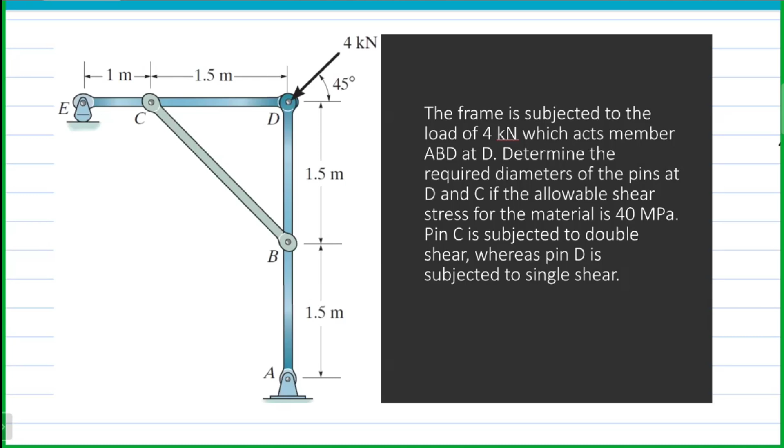We are required to determine the diameters for the pins at point D and point C. The allowable shear stress is already given, and another note is that the pin at C is subjected to double shear while the pin at D is subjected to single shear, so we need to determine their diameters.

I already wrote the requireds. So as our first step, we determine the unknowns for this problem. Second is to draw the free body diagram for the members. So I draw here the FBD of ABD.

Since we are required to determine the diameter at point D, we need to get dy and dx. But as you can see, this free body diagram has four unknowns. So how do we determine the forces?

Since this is a composite body, this will be a lot more complex than your regular composite body. So I suggest taking the moment at point A, since taking moments will eliminate some unknowns, and the forces at point A will not be useful for this type of problem.

If we take the moment at point A equal to 0, what forces will create a moment at point A? We have the x component of FBC, which will rotate counterclockwise, so that's negative FBC, horizontal component 1 over square root of 2.

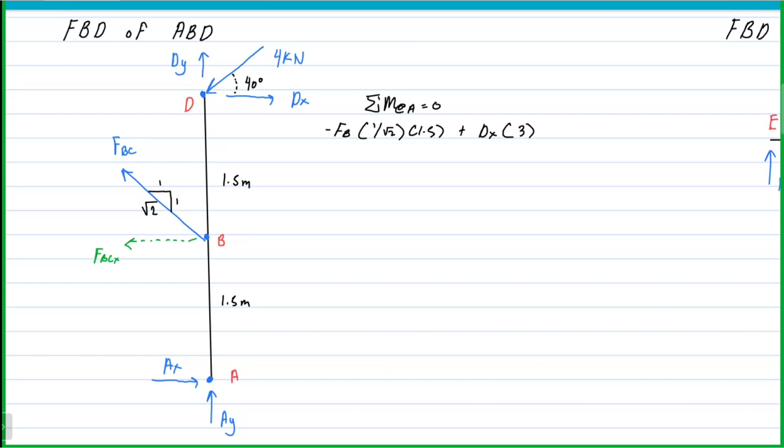The distance is 1.5. Dy will pass through point A. Dx will rotate clockwise, so that's dx with distance 3. And then the 4 kilonewtons will also create a moment, but this time it's the x component only, and it will rotate counterclockwise, so negative 4 cosine 40, distance 3 meters, equal to 0.

Let's take this as our equation 1. As you can see, we have derived an equation involving FBC and dx. I think that's okay for now.

Let's check if we can derive another equation from the FBD that will involve FBC and dx. Take note, we took the moment at point A since the forces at point A will not be useful for this problem. Here's the free body diagram for ECD.

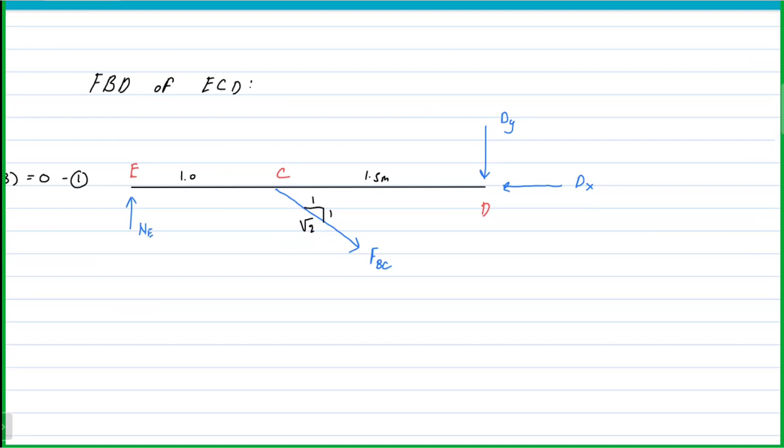We need to determine what equation to use for this free body diagram. It must again involve FBC and dx, so I think we could use summation of forces along the x-axis for this.

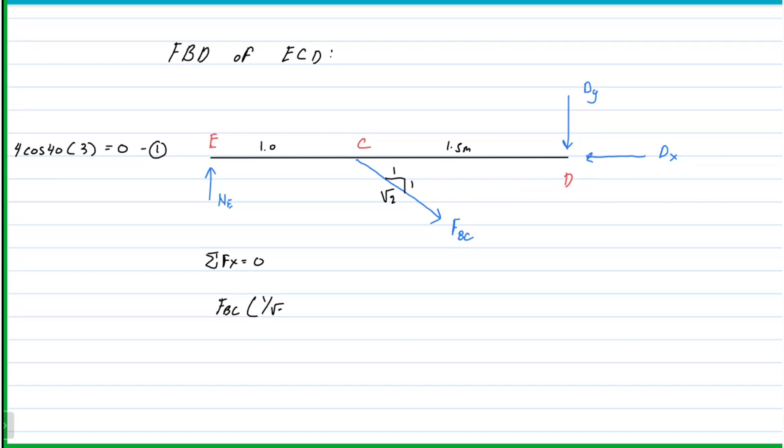As you can see, we have FBC to the right, so that will be positive, FBC horizontal component 1 over square root of 2. And then we have dx assumed to the left, so negative dx, equal to 0. This is our equation 2.

Fortunately, since we took the time to analyze the free body diagrams, we are able to generate equations that involve FBC and dx. With this, we could establish their values so we can eliminate more variables. So involving FBC and dx, we have equation 1.

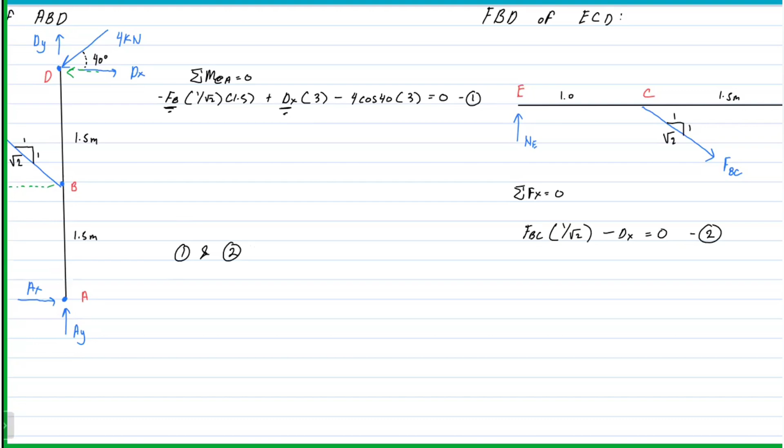Let's organize our equations. For equation 1, simplifying, we have negative 1.061 FBC plus 3 dx, and then we transpose the constant to the other side, giving a value of 9.193. So this is our equation 1.

For equation 2, we have FBC. So I'm going to write this here: 0.707 FBC minus dx equal to 0.

We could set FBC as our x and dx as our y values, and then use our calculators, mode 5.1, or the equation function on your calculator, or other methods to determine the values of FBC and dx. In my case, I will use my calculator.

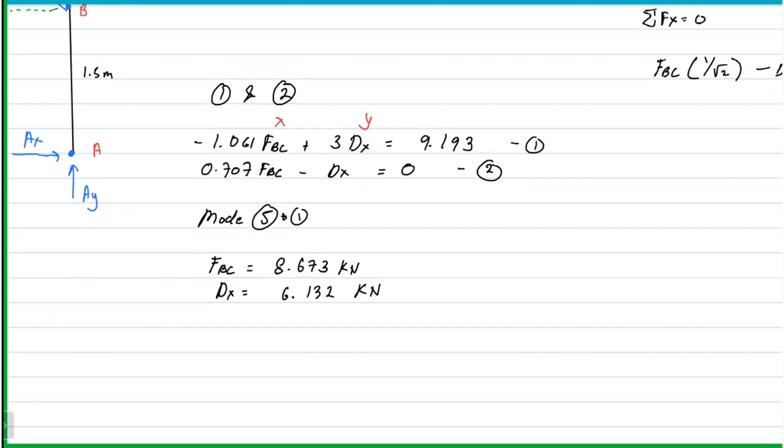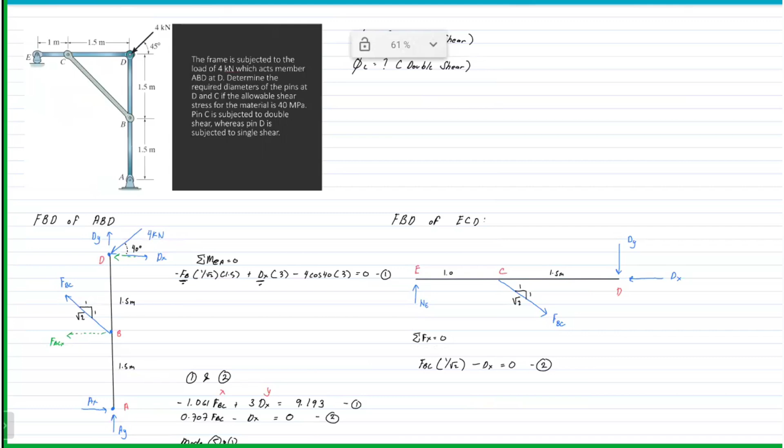So we could get back on our free body diagrams. Take note again, we are required to determine the diameter at point D and the diameter at point C. I think we could get the diameter at point C since we already determined FBC.

So the problem here is to determine the forces in point D. Since we have already gotten FBC, we could use this free body diagram to determine the other two, or to determine dy. We already gotten dx, so to determine dy,

we could take the moment at point E equal to 0. So the forces will be the vertical component of FBC. This will rotate clockwise, FBC will be rotating clockwise.

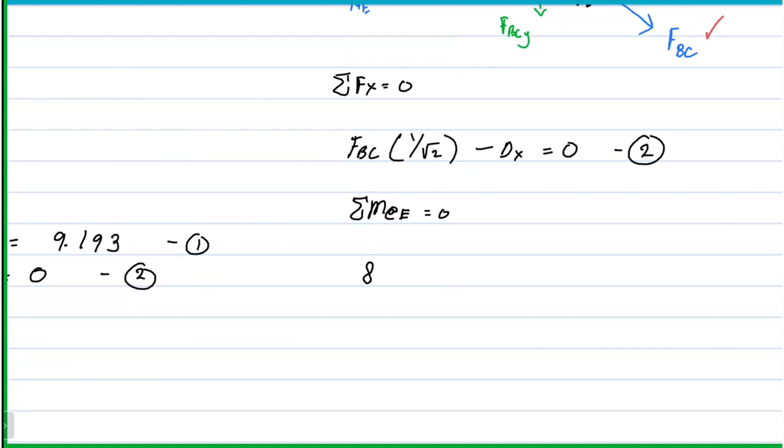So our FBC is 8.67, vertical component is 1 over square root of 2, distance is 1. And then we have dy rotating clockwise with a distance of 2.5. So that is equal to 0, so we could determine dy.

So we will get a negative value here. Negative 2.45 kilonewtons, or the direction will be 2.45 kilonewton upward.

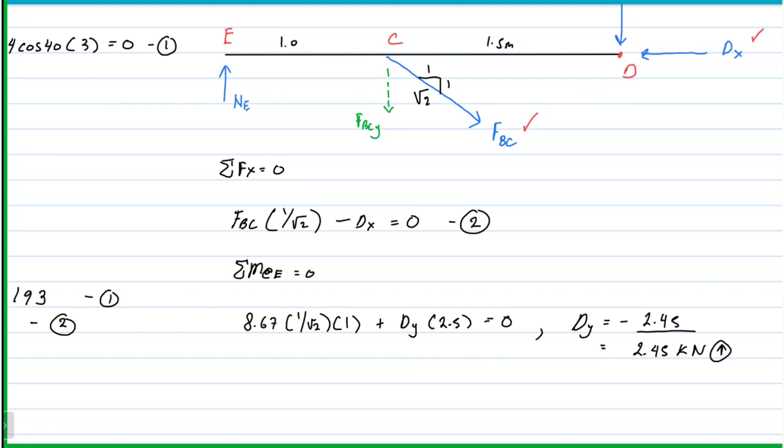So we finally gotten the required forces for each pin, so we could proceed in determining the required diameter. For the diameter at pin C, which is subjected to double shear, the allowable stress is 40 megapascal, equals the shear force at pin C, which is FBC. FBC equal to 8.673, so we could multiply this to 1,000 for it to become newtons over 2, since pin at C is subjected to double shear, times the area diameter squared. So to determine the diameter at pin C, we can use our Shift-Solve function.

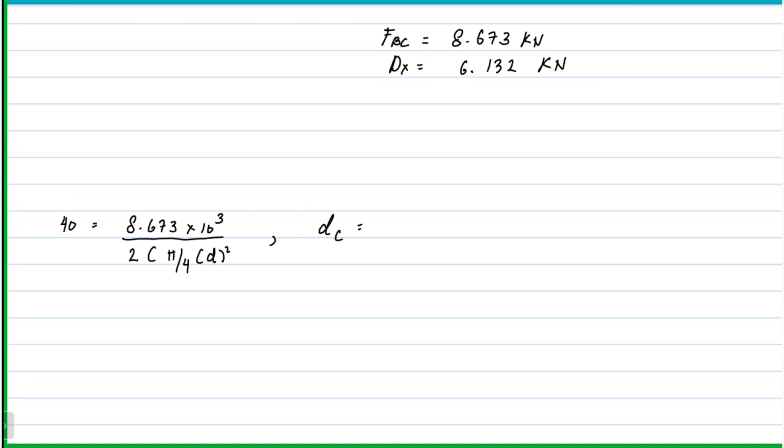So DC will be equal to 11.749 millimeters, or roughly 12 millimeters.

so to determine, we could use our calculators again to determine the value for the diameter at point D.

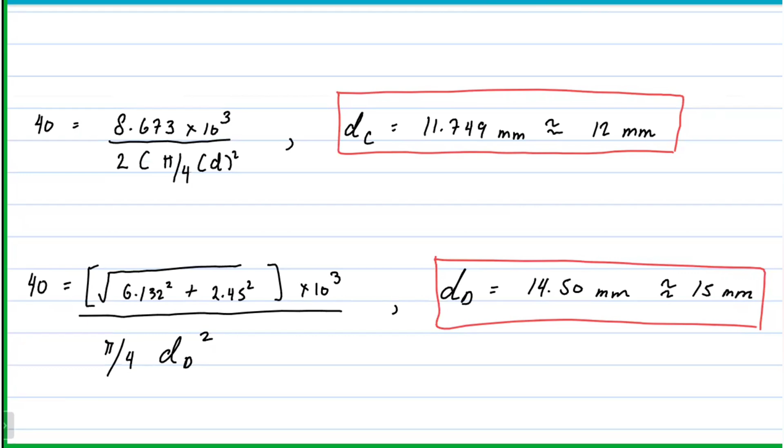So the diameter at pin D is equal to 14.49 or 14.5 millimeters, or roughly 15 millimeters. Okay, so another set of examples for shear stress involving composite bodies of structures.

All right, so for the next problem, this is a combination of axial stress and shear stress. This is a design problem since we need to determine a minimum value for a dimension. This is a truss made from Guijo, a type of wood used in construction. There's a vertical load applied at the top of the truss, and we are given different sets of allowable stresses for the grade of wood: compression stress parallel to the grain, a compression stress perpendicular to the grain, and a shear stress parallel to

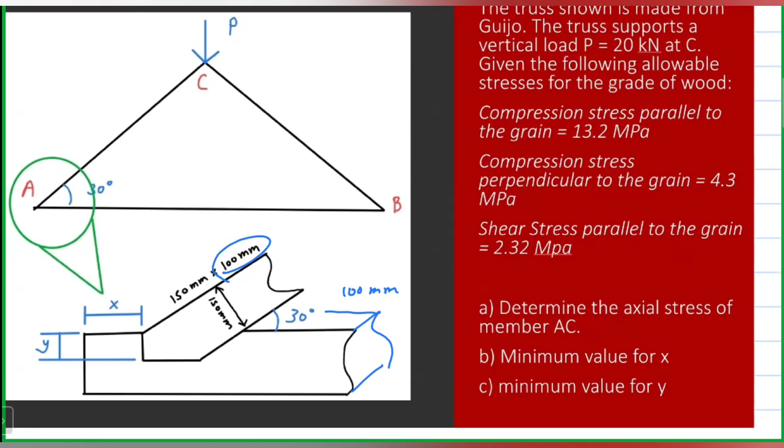So we need to determine the axial stresses. For us to determine the axial stress, of course, we need to get its axial force first. So since this is a truss, we can use method of joints.

It will be easier rather than using method of sections. Let's take that. So we can consider the joint C for determining AB.

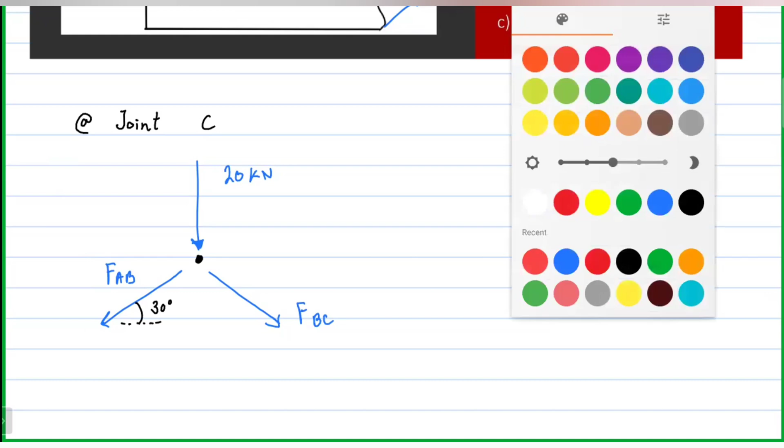So we could use summation of forces along Y first. So you have negative 20. Since FAB and FBC is symmetrical, most likely FBC is equal to FAB. So we can use -2 times FAB sine 30 equal to 0.

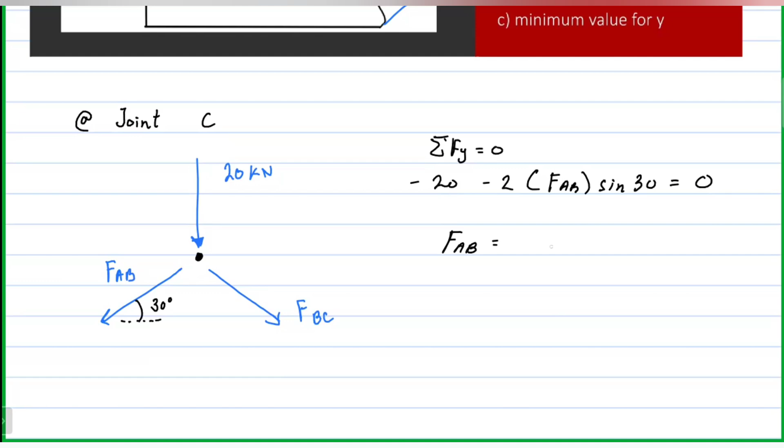So solving for FAB, so FAB is equal to 20 kilonewtons. So since this will be negative, it means this is 20 kilonewtons compression. So we assume FAB and FBC as tension, but in reality they are in compression.

So since we have FAB, we could easily determine the axial stress. So axial stress of... oops, I'm sorry, it's not FAB, FAC rather.

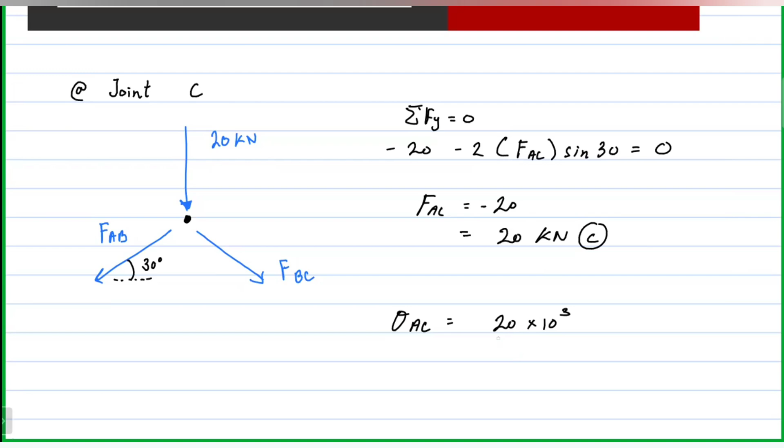So the stress at AC is equal to the force. The actual force is 20, so let's multiply it by 1,000. And then the cross-sectional area of FAC is 150 by 100 millimeters. So our stress at AC is equal to 1.33 megapascal compressive stress.

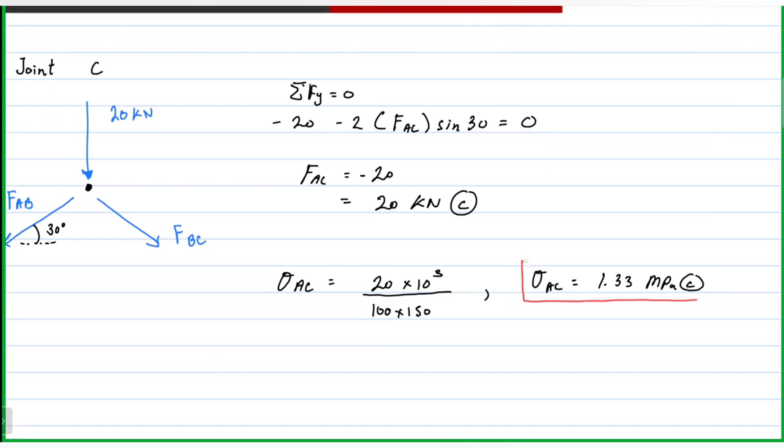Okay, so just as easy like that. And then let's determine the minimum value for X and Y. So investigating this figure, we know that FAC is here, or the force is residing in this member, compressively going to joint A.

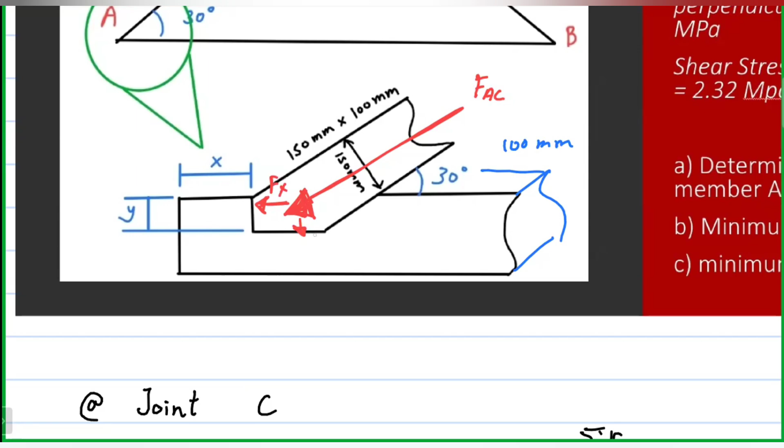So we could further analyze this figure if we look at this force by its component. So this force has two components, the Fx and the Fy. So let's check first the Fx.

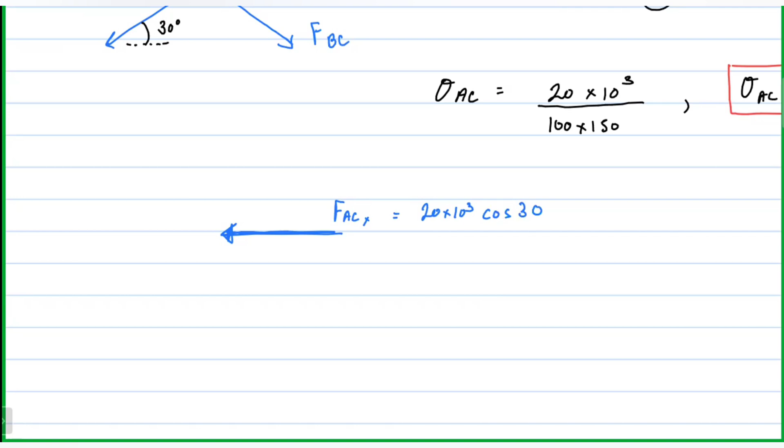If FACX is equal to the force AC cosine 30, so it matches there at the part of our Y. So this is now it. So this is the Y, and then this is the thickness of the member.

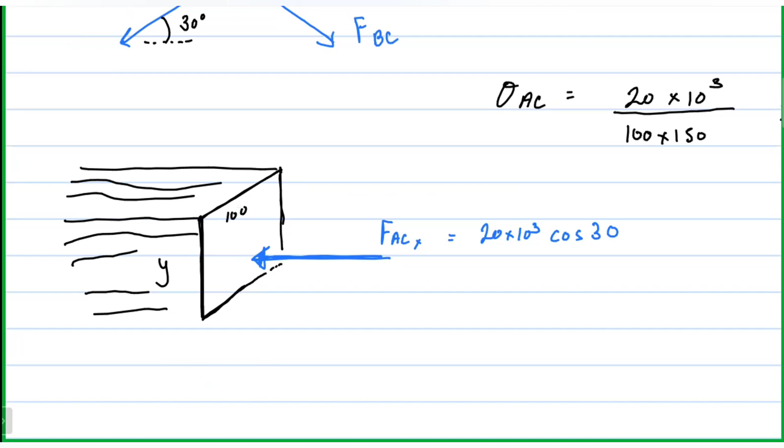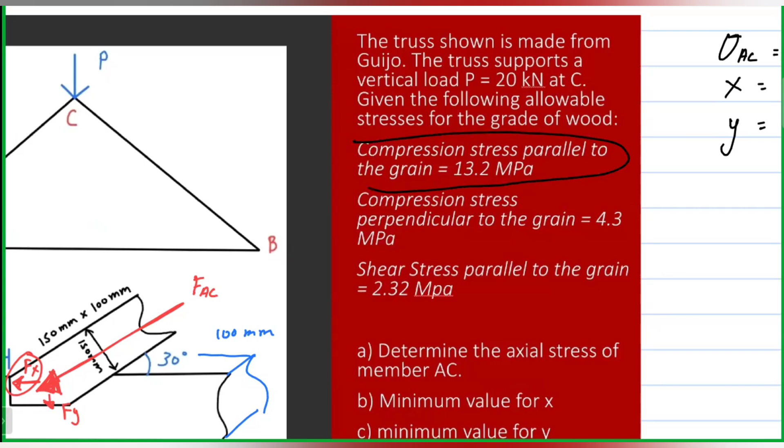So this is the member, so the grains are here, and they are being subjected to compression. So for us to determine the minimum value of Y, we could use the value of the compression stress parallel to the grain, since the force involved in this figure is parallel to the grain.

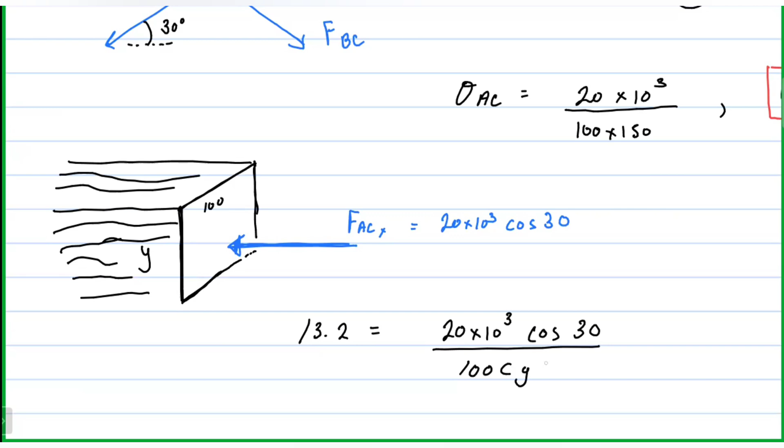So that will be 13.2 megapascal. So the force involved is FAC cosine 30, and the area affected by this force is this rectangular area, which is 100 times y.

So solving for y, y is 13.12 millimeters.

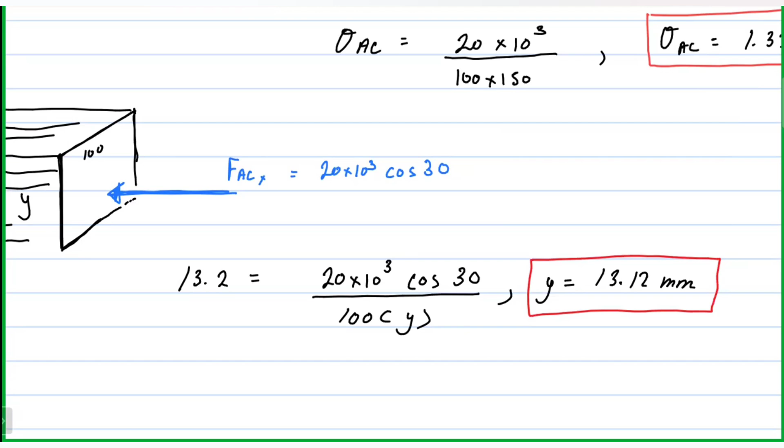And then for the minimum value of x, if we could see this, so the possibility here is the compression might resist FACX, but it can be sheared along this area, which is also equal to x.

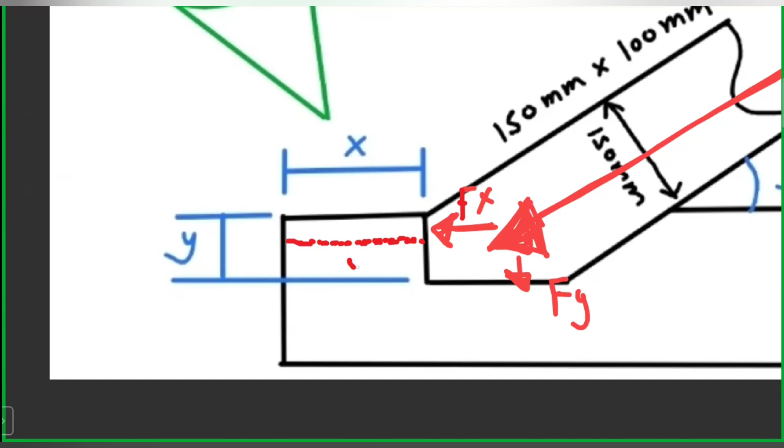So if we investigate that area, the shape will be like this. So this is the x, and then this is the thickness of the member. So these are the grains of the member.

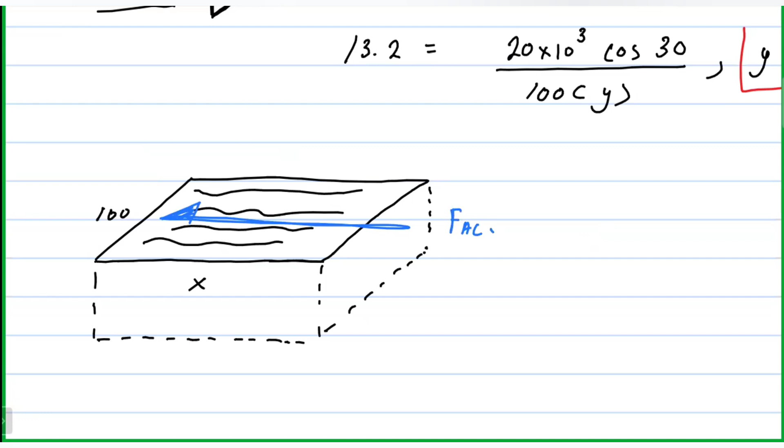And the force that will pass through in this area is also FACX. So we have to use the shear stress parallel to the grain, which is equal to 2.32 megapascal.

So 2.32 megapascal is equal to FACX, similar from the previous, cosine 30, over the area that will resist, which is 100 times x. So the x value is equal to...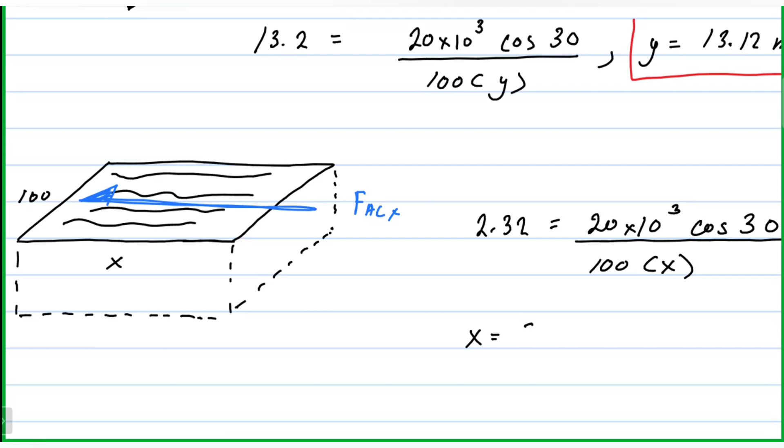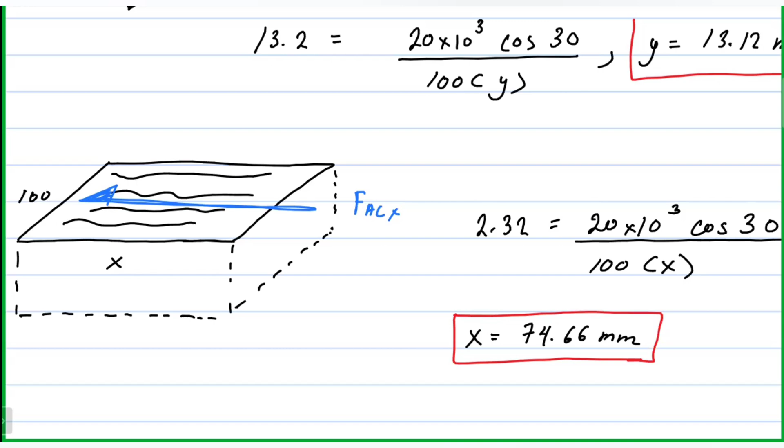The minimum value of x must be equal to 74.66 millimeters. So this is a type of problem that you need to visualize and understand, since there are different variables given to us. You have to be familiar with terms such as grain, perpendicular to the grain, parallel to the grain, and so on and so forth.

Okay, so this time I'll be discussing a sample problem involving punching shear. There's a lot of difference between your normal average shear force and a punching shear, so I'll discuss what will happen when a punching shear is involved.

For this problem, it is stated that a hydraulic punch press is used to punch a slot in the plate, so a puncher is used to punch that plate. That plate is 0.50 inches thick, and if the plate shears at a stress of 30 KSI, we're given an allowable stress — this means this is a design problem involving punching shear. So we have to determine the minimum force P required to punch the slot.

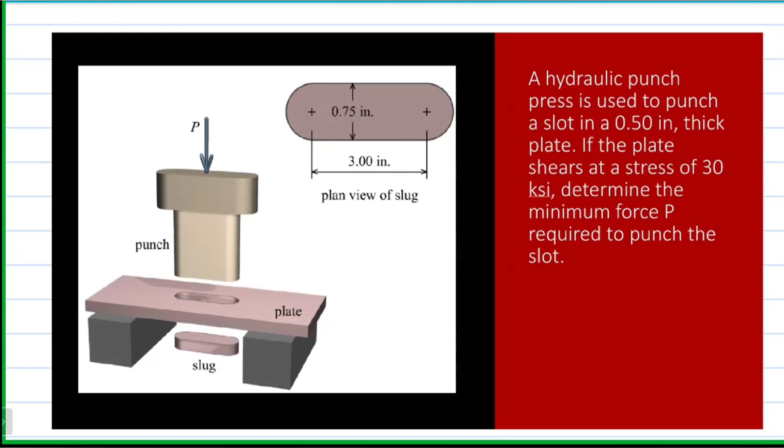So for us to easily analyze what is punching shear, I already drew the slug. We are required to determine P. So this is a drawing of the slug. Based from the punch, force P is already applied on the slug. So the question here is, where will the shear force happen?

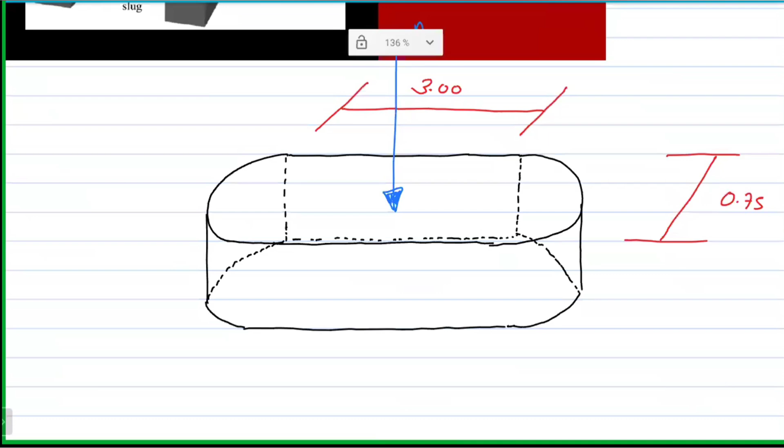Since that slug comes from the plate, it means the force P applied by the punch already passed through to the plate. So the shear force that resists from the slug or from the punch applies here at the edge, or at the surface area of the slug. So to further elaborate, this punching force P was resisted by the shear that was wrapped around along the surface area of the slug. That's the difference between average shear stress and punching shear stress.

We could also utilize the normal stress and the bearing stress. Normal stress is a concentrated load over a cross-sectional area, while bearing stress is an area versus an area of effect. So in terms of punching shear, there are similar things involving those forces.

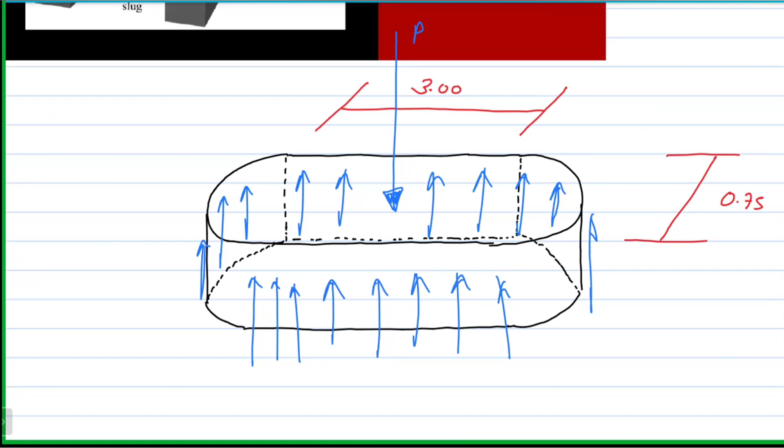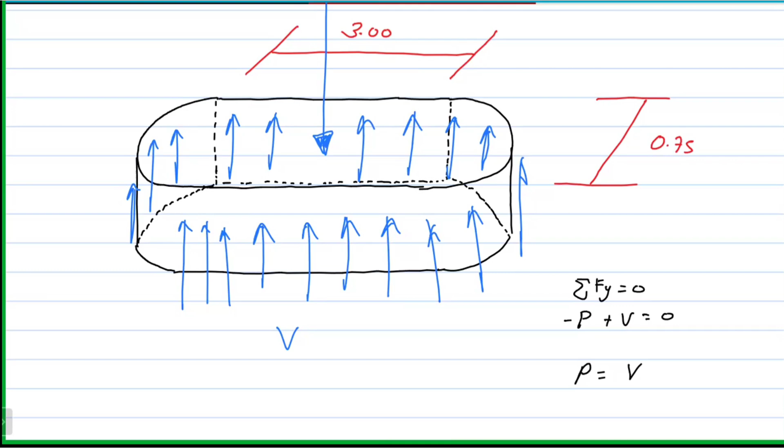So the problem here is your shear force, there's a lot of it, wrapped around. If we took the summation of forces along the y-axis, we could see that negative P plus V is equal to 0, or P is equal to the shear force. If you recall from bolts evenly distributed, sometimes P is equal to 4V, or V is equal to P over 4. So here your V is wrapped around, even though it looks like there's a lot. So the goal here is to determine what area it's resting on.

So for this, we have the similar formula for shear stress: shear is equal to shear force over area. We know that our allowable shear stress is equal to 30 KSI, and then our shear force is equal to P. So the area here is the challenge.

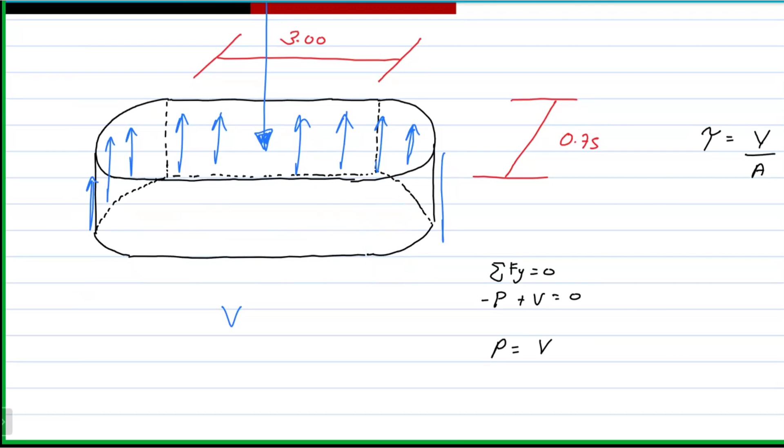I hope your foundation of solid geometry is okay. This is a combination of a rectangular area and a cylindrical surface area. So for this slug, let me erase these shear forces so you can visualize the surface area. The surface area is like the outer skin of the slug. To determine the surface area, we could divide this slug into two shapes.

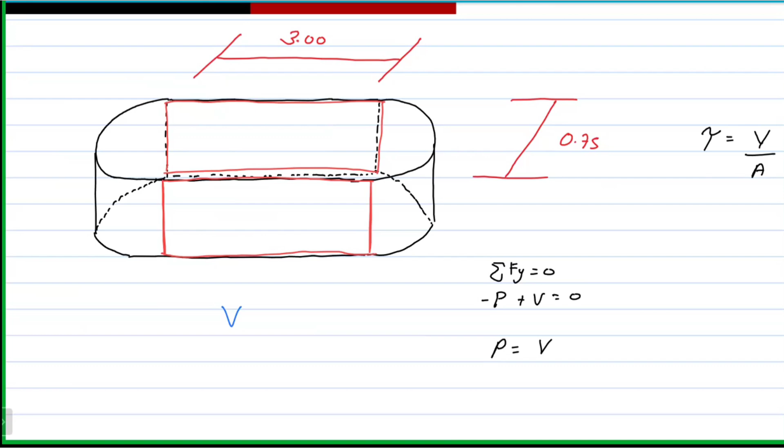We could take the surface area of these two rectangles, from this side and the side on the other. That rectangle has 3 inches in length and a height of 0.5 - the thickness of the slug is 0.5. So the area of the two rectangles is equal to 2, since there are two, times 0.5 inch times 3. But that's just the rectangle part.

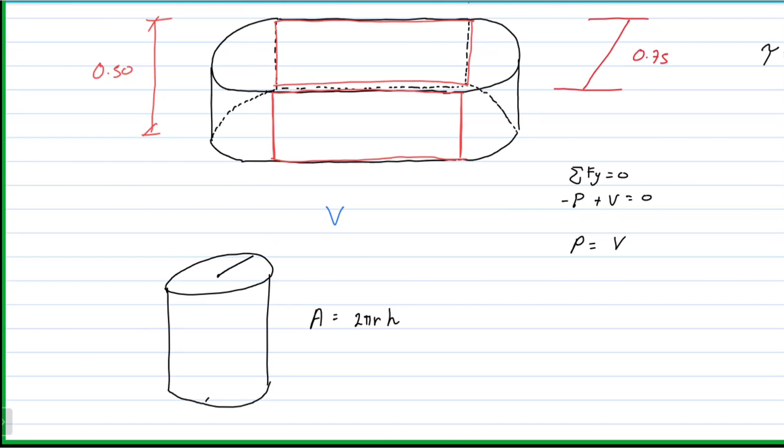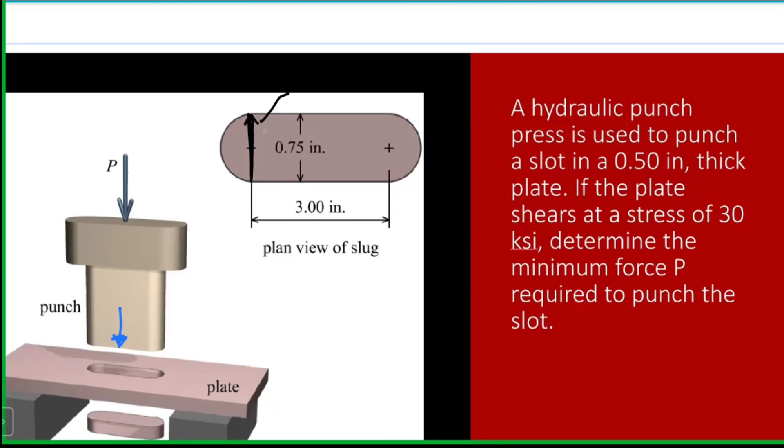So, hopefully you still remember, the surface area of the cylinder is actually equal to 2 pi r times the height. So, question: what will be our radius here? Since this rectangle is equal to 0.75, that is equal to the diameter of the circle. So this diameter, or the radius, is equal to 0.75 over 2.

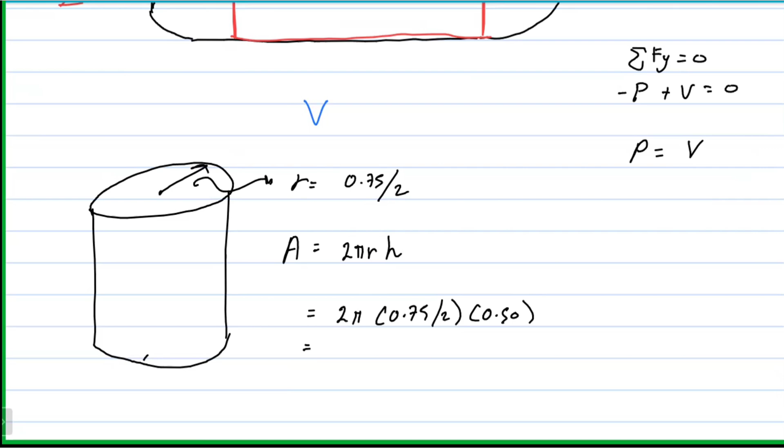So that radius comes from the thickness or the width of the slug, which is 0.75 over 2. So to determine the surface area of the cylinder, that's 2 pi times 0.75 over 2, times the height which is also equal to 0.50. So the surface area of the cylinder is equal to 1.178 inches squared. So let's just add that in now.

So finally, we can solve for P. P is equal to 125.34 kips, since 30 is in KSI and this is in inches. So that's how you determine, or that's how you analyze, punching shear.

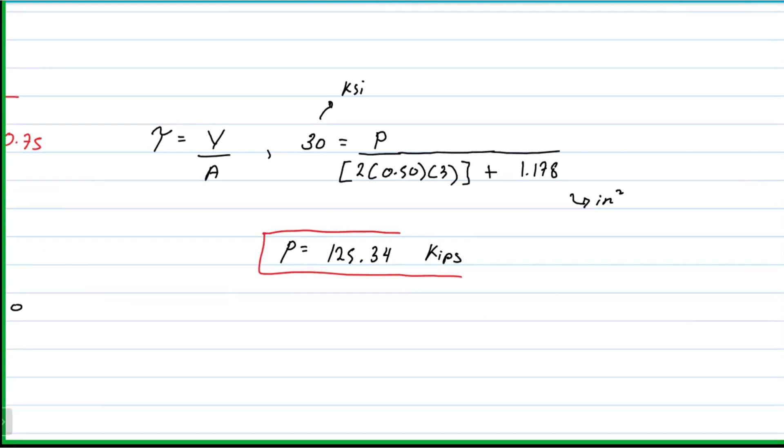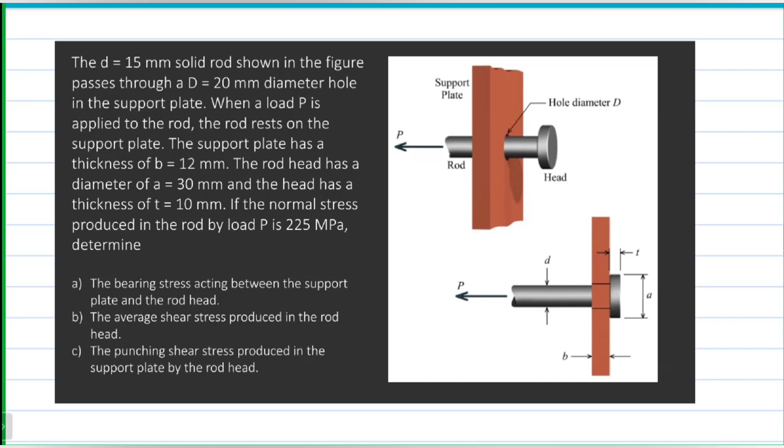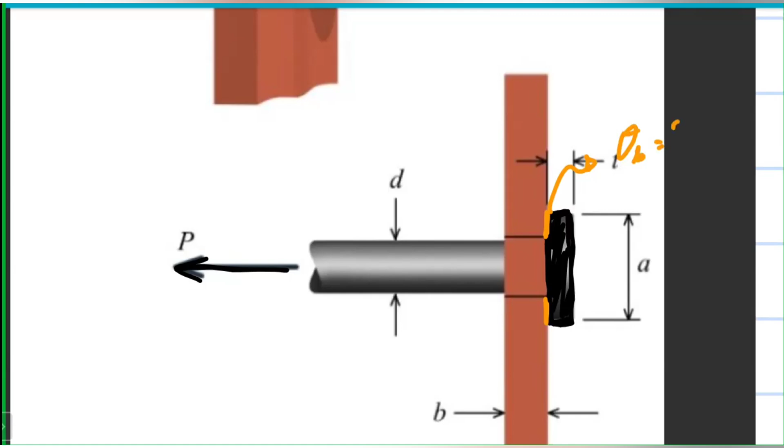So we were asked to determine the bearing stress between the support plate and the rod head. If we look carefully in the figure, we could see that this is the rod head, and later on the rod head will be placed in the support plate. If this rod is being pulled to the left, there will be some bearing stress that will occur in between the rod head and the support plate. So we have to determine what is this bearing stress. For this question, let's analyze this.

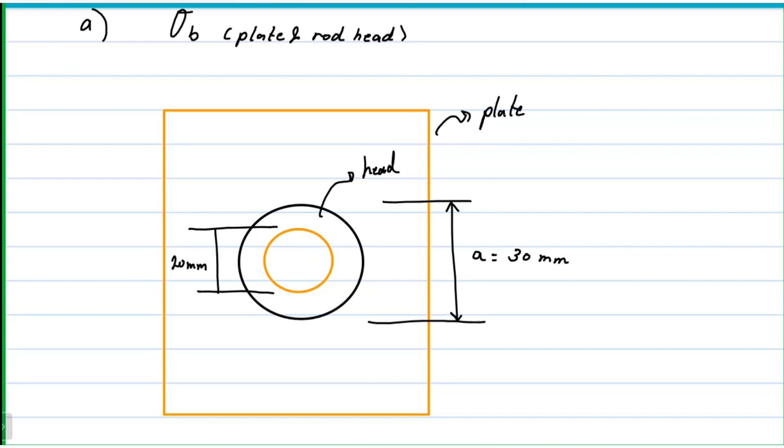If we look on another angle, this will be the image of the rod head and the support plate. The black figure here is the rod head, while this orange figure here is the support plate. As you can see, the rod head will bear against the support plate, so the bearing area will be this.

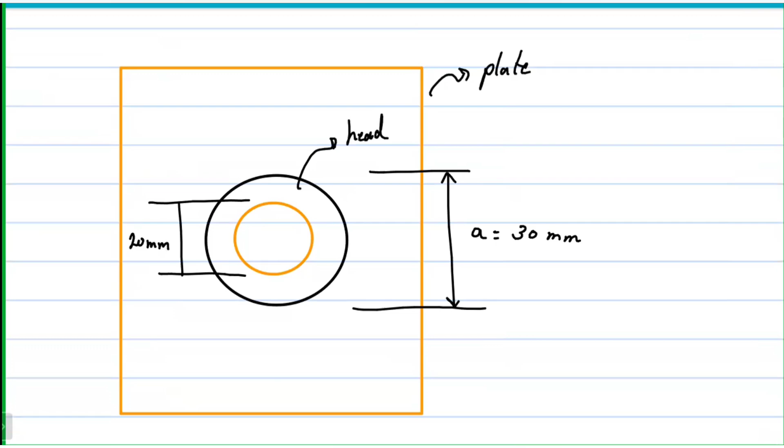It is the same as our previous problem during lecture in which we analyzed a tube, so we have to determine this area of the tube. There will be no challenges in this part since the outer diameter is given and the inner diameter is already given. So it's more on the analysis part on how you will visualize what will happen to the rod head if it bears on the support plate and what area of contact will be involved when analyzing this figure.

So for our bearing stress, it is equal to force over area. So area can be computed. The question here is what will be the force that will produce the bearing stress. Going back to the problem, the normal stress produced in the rod by load P is equal to 225 megapascal. So we could utilize this value of normal stress to determine what was the load P that is being used to produce this kind of stress.

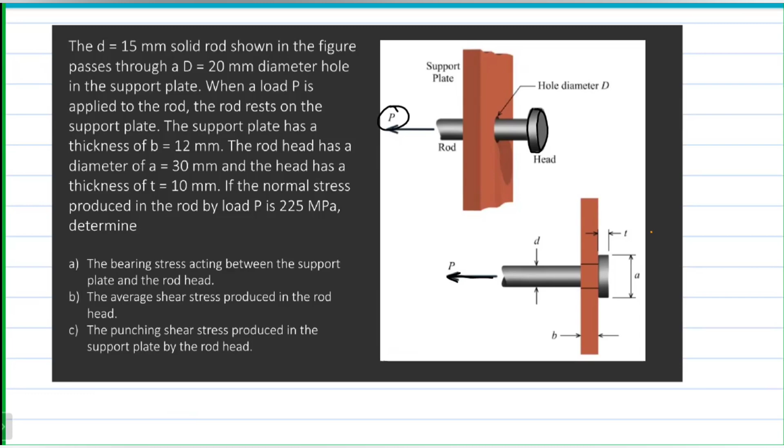Remember that force is equal to stress times the area. So we're given a value of stress equal to 225 megapascal. This is produced in the rod by the load P, so it means we have to consider the cross-sectional area of the rod, in which case the cross-sectional area of the rod is circular in shape and has a diameter of d, which is equal to 15 millimeters.

So to determine the force, that's stress times area, 15 squared. This is in megapascal, this is in millimeters squared, so we'll be expecting a unit of newtons. So this is 39,760.78 newtons. This force will be used later on, so you might as well store your data in your calculator.

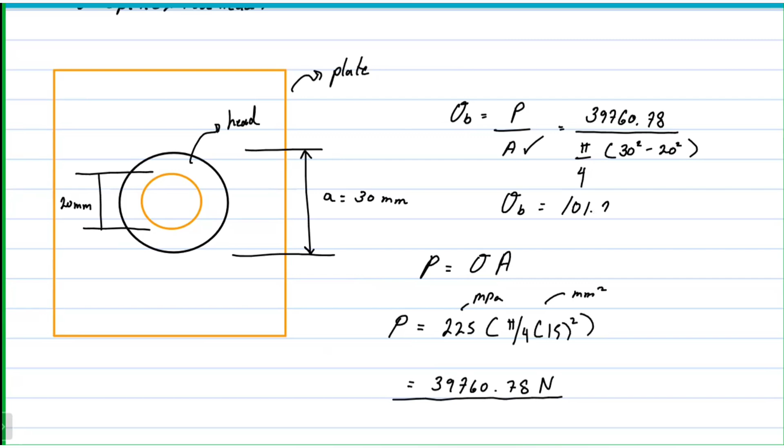Going back to our formula, so the load is 39,760.78 and then over the area of the annulus or the tube. So that's pi over 4, outer diameter 20 squared minus, outer diameter 30 squared minus 20 squared. So bearing stress between the rod head and the support plate is equal to 101.25 megapascal. As you can see, the analysis is not that complex or complicated.

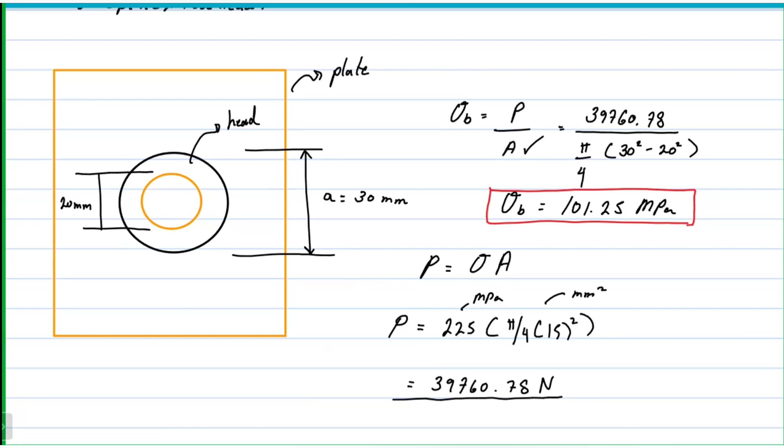The challenge here is to determine the area of contact and of course understanding the problem statement. So that's for letter A, the bearing stress between the plate and the rod head.

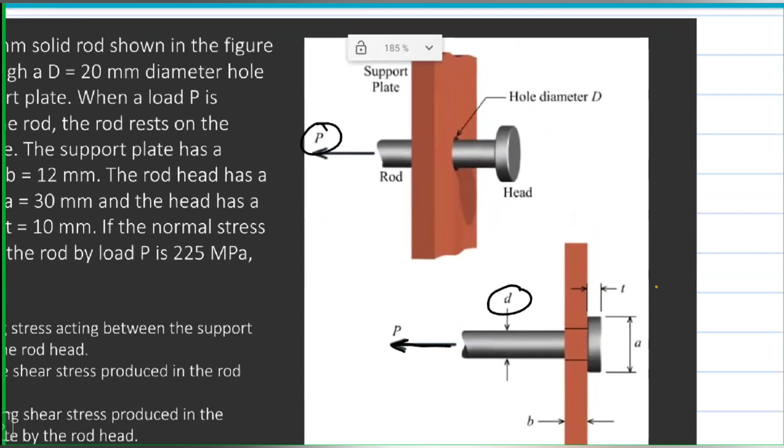So for letter B, you have to determine the average stress produced in the rod head. As you can see, this is the rod head. So what will be the shearing stress that will occur in the rod head? As you can see here, the rod is actually part of the rod head. So in case the support plate is stronger than the material for the rod, there is a tendency that if you pull the rod head to the left, a shearing stress will occur on this part. The shearing force will be on the opposite direction.

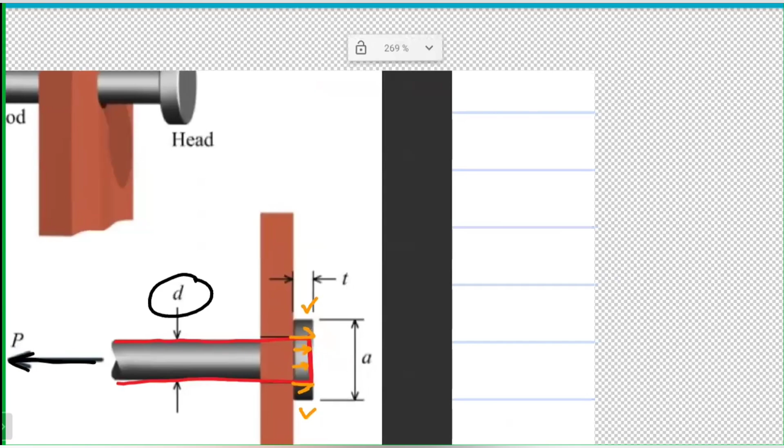A shearing force will be produced on the rod head itself, causing the rod to slip outside of the rod head. So to further analyze this action, here's a diagram that I already pre-drawn.

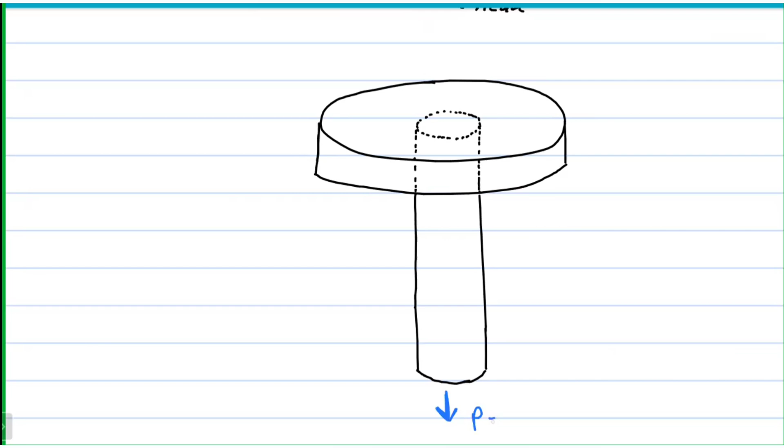Once this rod head is pulled, once this rod is pulled downwards with P, we have this value that we got earlier. So the tendency is this part of the rod will be subjected to shear.

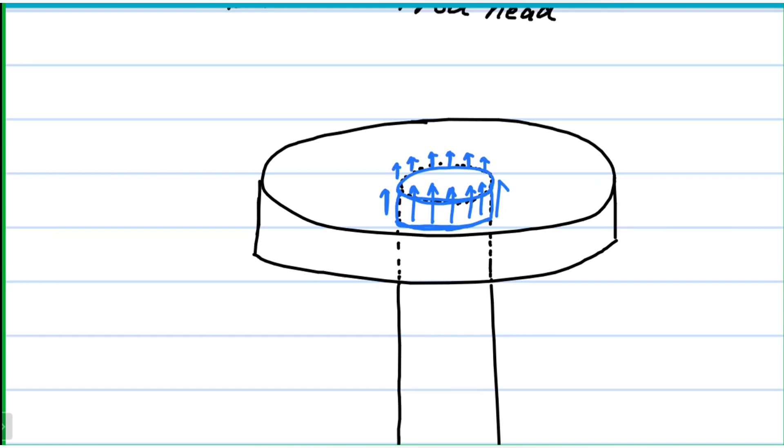This will counteract the force that was produced in the rod. So as you can see, this is another example of a punching shear. If I will be able to isolate this part of the rod head, the free body diagram will be like this. This is the part that will be sheared off in the rod head. So the shear is placed around this part. This is the force P, this is the shear force V.

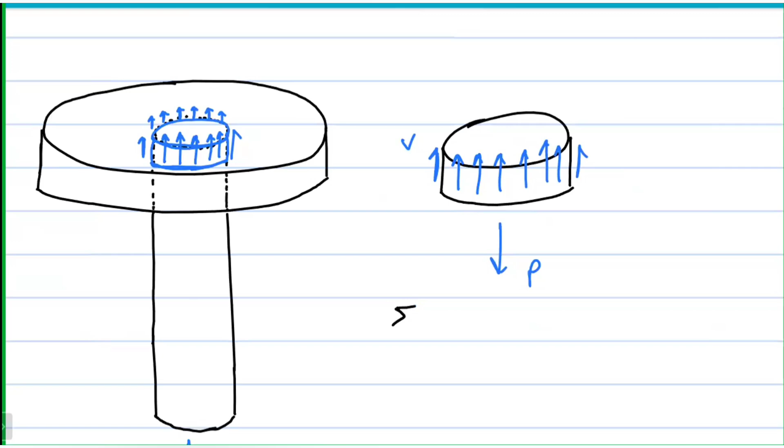So if we take the summation of forces along y equal to 0, you could see that V is equal to P. Again, from our previous example, shearing stress or punching shear is similar to our average normal stress, which is equal to shear force over area.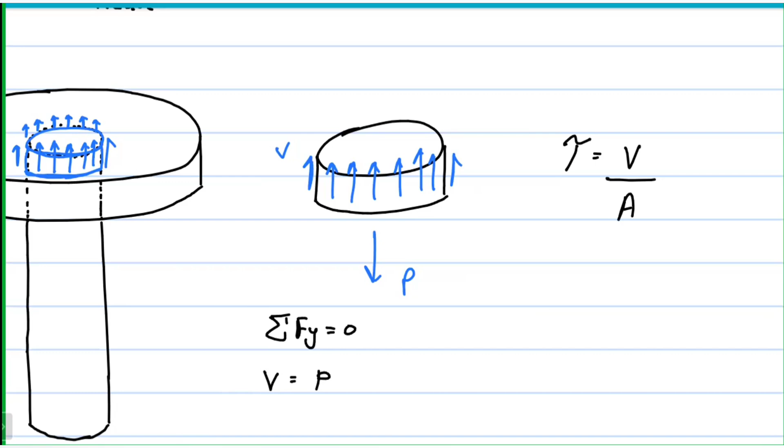So V is equal to 39,760.78, while the area, again we'll consider the area of a small cylinder or the surface area of a small cylinder, which is equal to 2 pi r times h. The diameter of this rod was 15 millimeters, so that's 2 pi, radius is 15 over 2.

And this height is equal to the thickness of the rod head. So the thickness of the rod head mentioned was 10 millimeters. This is a straightforward solution for this kind of problem. However, you have to identify the visualization of the problem.

How will the shear stress be produced in the rod head? So computing for the shear stress, we got 84.38 megapascals. A very straightforward solution.

So the only problem again is the visualization of the stress itself. And then lastly, for letter C, the punching shear produced in the support plate by the rod head. So this is the vice versa of the situation that happens in letter B.

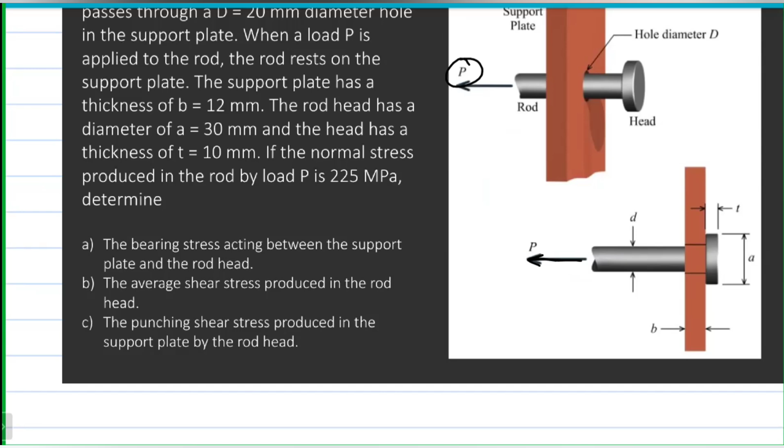This time, the material in the rod head is much stronger than the support plate, so this rod head will pass through to the support plate. So we have to determine what will be the punching shear here in the support plate, between the support plate by the rod head.

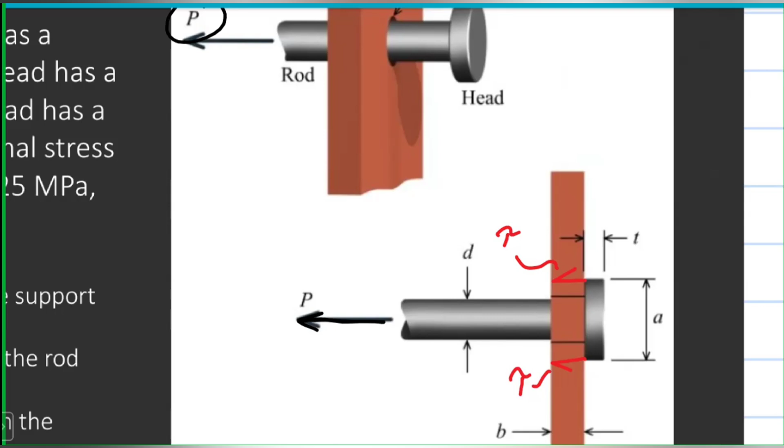To visualize this problem, we can draw it in this kind of orientation. So this is the rod head, this is the rod head, and this is the support plate. So what happens is that this rod head will pass through to the support plate. So the support plate will be chipped off and it will look like this.

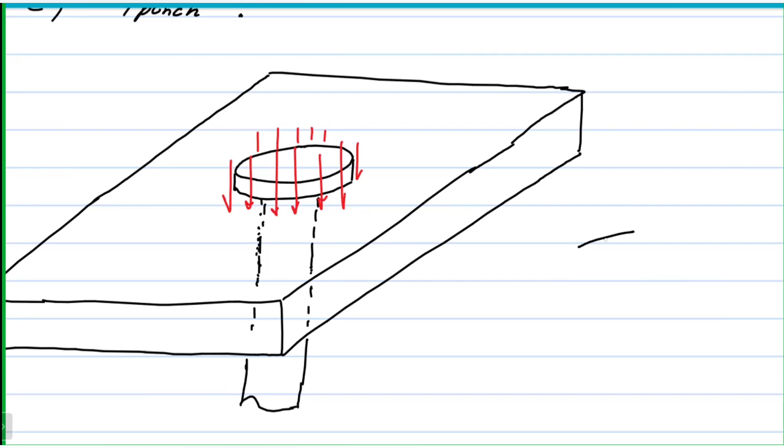So it's another small cylinder, but we have to determine again the surface area. So the diameter of this small cylinder is also equal to the diameter of the rod head, basically the part that passed through the support plate. So the diameter of the rod head was 30 millimeters. From this, we will be able to get the radius of the circle.

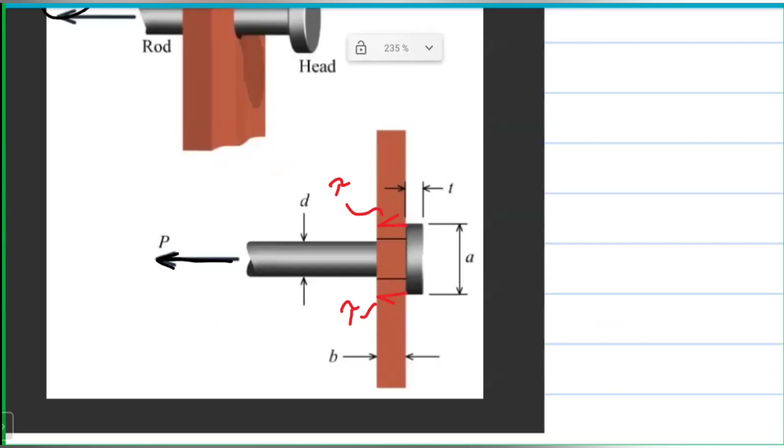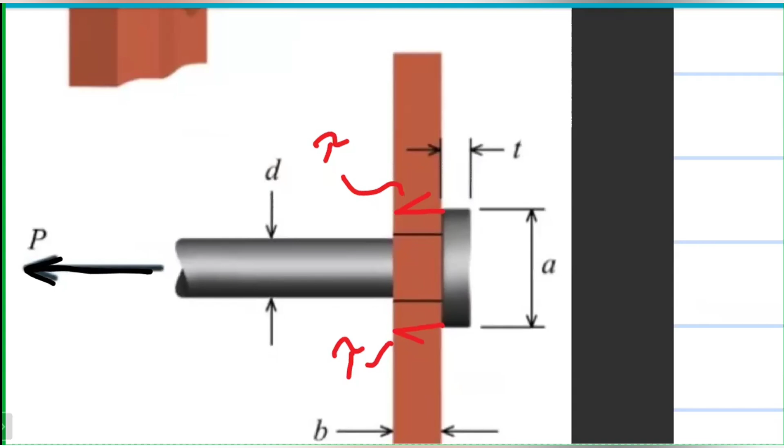So the question here, what will be the thickness to be considered? Will it be the thickness of the rod head or the thickness of the support plate? Of course, from the definition of the punching shear, the rod head will pass through, so it means the whole thickness of the support plate will be cut off. So we have to consider the thickness of the support plate, which is equal to 12 millimeters. So we will use 12 millimeters.

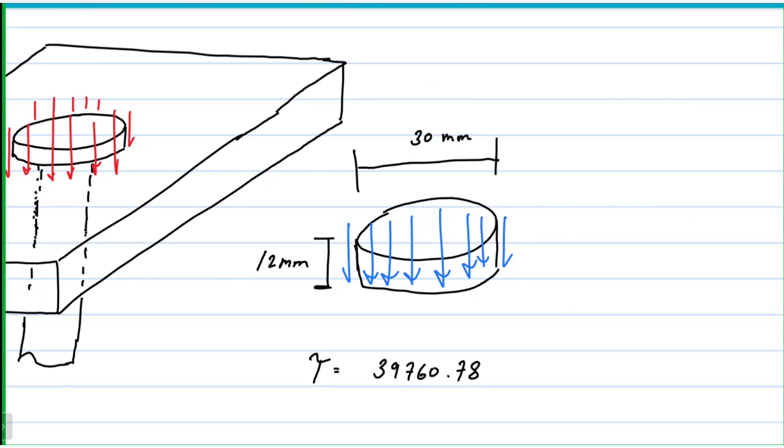So the punching shear is again wrapped around this small cylinder. So again, with our formula, V is equal to P, which is 39,760.78. And then the surface area of a cylinder is 2 pi, radius is 30 over 2, and then height is 12 millimeters.

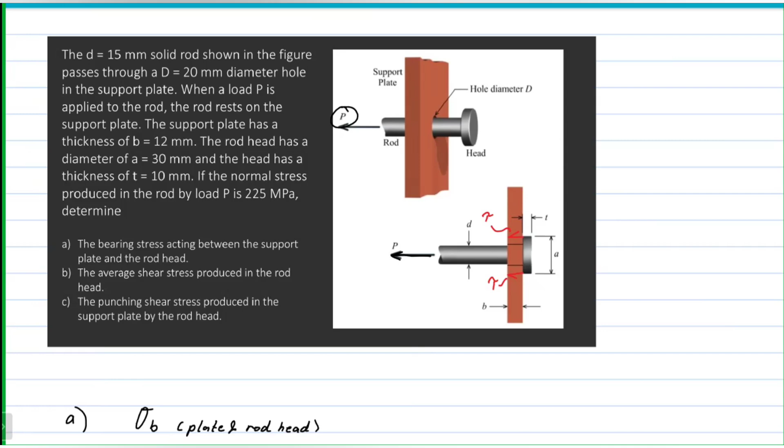So I hope you learned something from this video. Thank you.